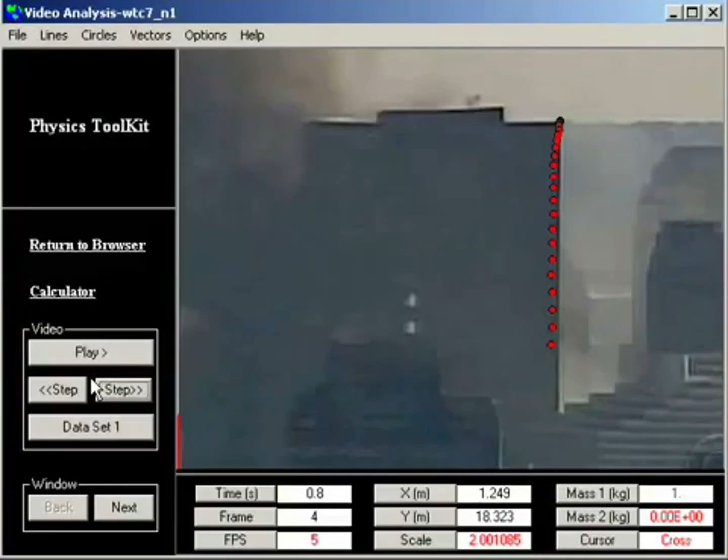I responded with a video posted on YouTube called WTC7 in Free Fall, in which I showed that for approximately 2.5 seconds, Building 7 fell at a rate indistinguishable from free fall. Furthermore, in that video I showed that NIST's methodology was not a way to analyze the true motion of the building. NIST's measurement was not just wrong, it was fraudulent.

Then on August 26th, NIST staged a technical briefing in which engineers and others with technical credentials could pose questions. I'm a high school physics teacher, so I figured I would be excluded. However, I went ahead and registered, citing my membership in the American Association of Physics Teachers as my professional affiliation. By the way, I am not speaking for AAPT. That was just my passport into the briefing. To my surprise, my credentials were accepted and I was able to pose a question. Here's a little of how it went.

Our next question comes from David Chandler of the American Association of Physics Teachers. Any number of competent measurements using a variety of methods indicate the northwest corner of WTC7 fell with an acceleration within a few percent of the acceleration of gravity. Yet your report contradicts this, claiming 40% slower than free fall based on a single data point. How can such a publicly visible, easily measurable quantity be set aside? Can you repeat the question, please? Sure.

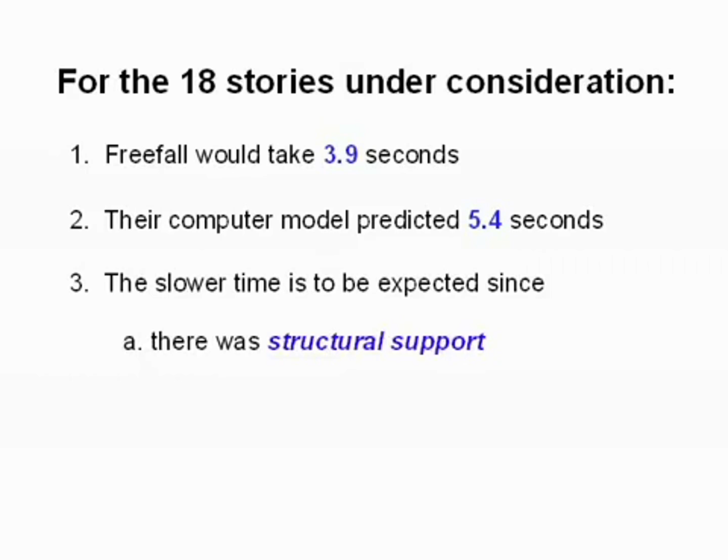Buried in all that verbiage, what Dr. Sunder is saying is, free fall for the 18 stories under consideration would have taken 3.9 seconds. However, their computer model simulating collapse required 5.4 seconds. The slower collapse time was to be expected, since there was structure supporting the building as it fell, slowing the fall, that there was a progression of failures that had to take place, and that these were not instantaneous. All of this makes sense as long as you don't look at the evidence.

The evidence shows that free fall actually occurred, but since their computer modeling could not come up with a scenario that would allow for free fall, they had to declare free fall out of bounds and try to cover up the evidence. The problem is, unlike the columns and girders buried deep inside the building, the motion of the building is right out in plain view.

Since their model predicted 5.4 seconds for the 18-story collapse, they dutifully conjured up a 5.4 second measurement to match. They had to stretch themselves to do it, but they did it. They found the disappearance time, then they went out of their way to pick an artificially early start time, exactly 5.4 seconds earlier. This they compared with free fall time.

This next question comes from Dr. Stephen Jones. NIST discusses the fall time for WTC-7 on page 40 of the summary report, where it's stated, assuming that the descent speed was approximately constant. However, observations by others of the descent speed show that the building is accelerating rather than being at constant speed. So the question is, why did NIST assume that the descent speed was approximately constant?

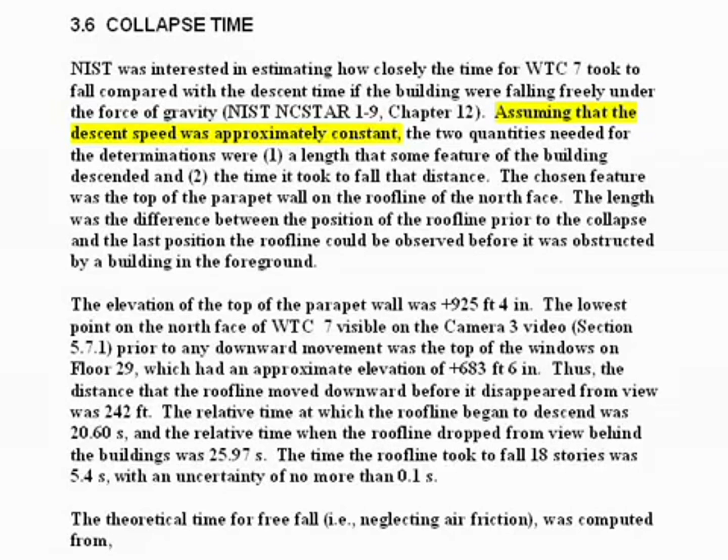Stephen Jones was calling attention to the obviously erroneous claim on page 40 of the draft report that stated that the building descended at constant speed. I'm sure constant speed was a simple misstatement. The correct response should have been, whoops, we'll fix that. But no, here's how they handled that question.

Force of gravity, obviously the acceleration of gravity, is what's the driving force, and our calculation was based on the amount of time from the top of the parapet to fall till it disappeared from view between the two buildings seen in the video. That time was established from the video by single frame search of the time, so that was down to 1/30th of a second, and then we did the same thing for when the top of the parapet disappeared. We found that time to be 5.4 seconds.

I didn't hear a whoops in there, did you? This is John Gross, one of the lead engineers for the NIST report on the collapse of the Twin Towers. He has a PhD in structural engineering from Cornell University. He taught engineering at the University of Colorado in Boulder. He has a long resume on top of that. Don't you think he probably knows the difference between speed and acceleration? Don't you think he could explain it with perfect clarity if he wasn't so preoccupied trying to cover his tracks?

Don't you find it interesting that the 5.4 seconds he measured for the collapse time just happens to exactly match the theoretical prediction of their model? That kind of precision is incredibly rare when modeling real-world events. Incredible is the right word. It's not credible. This measurement has all the characteristics of what we call dry labbing, manipulating the data to fit a predetermined outcome. It's an ethics violation in science on a par with plagiarism. Any engineers engaging in this kind of sleight of hand should lose their licenses. The larger implication, of course, is dry labbing in this kind of investigation would constitute a criminal cover-up.

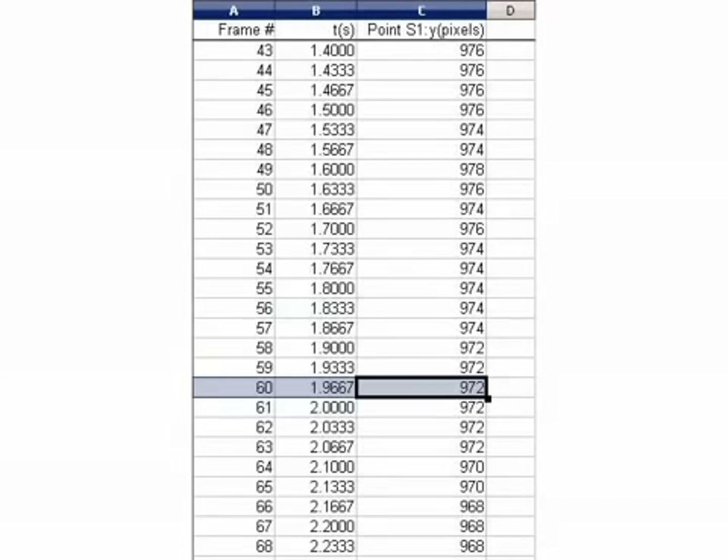Even then, there isn't any progressive ongoing movement of the roofline until about frame 60. By then we're back to just over 3.9 seconds of collapse time, or in other words, the onset of freefall. The only rationale I can see for choosing frame 16 to start the clock is to make the measurement come out to exactly 5.4 seconds, to agree with the prediction of NIST's collapse model.

But what if I'm wrong? What if they did see some tiny movement on a clearer version of the video? That tiny movement, whatever it might have been, did not last. It would have had to have been a glitch, and the scientists at NIST would recognize it as a glitch, because there's no measurable difference in the height of the roofline for the next 20 to 30 frames.

What can we conclude? You can draw your own conclusions, but I think it's pretty clear that the whole idea there is any kind of real 5.4 second collapse interval is a fiction. It's a crude fabrication, and the three-stage collapse sequence is pseudoscience in the service of an ongoing cover-up. In Part 3, we will return to the central question. In conceding freefall, what has NIST actually admitted?

Shyam Sunder is the lead investigator for the NIST analysis of the collapse of World Trade Center Building 7. In the technical briefing on August 26th, Dr. Sunder clearly explained why freefall for World Trade Center 7 was impossible.

The analysis showed there's a difference in time between a free fall time. A free fall time would be an object that has no structural components below it. And that is not at all unusual, because there was structural resistance that was provided in this particular case. And you had a sequence of structural failures that had to take place, and where everything was not instantaneous.

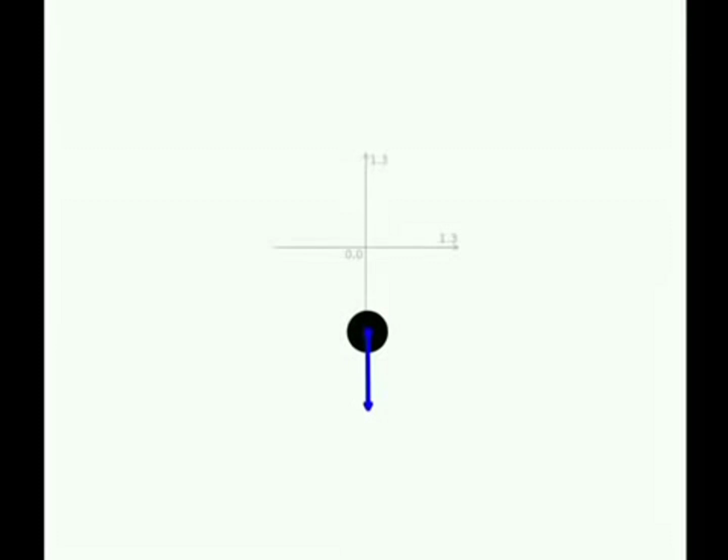Anything at an elevated height has gravitational potential energy. If it falls and none of the energy is used for other things along the way, all of that energy is converted into kinetic energy, the energy of motion, and we call it free fall. If any of the energy is used for other purposes, there will be less kinetic energy, so the fall will be slower.

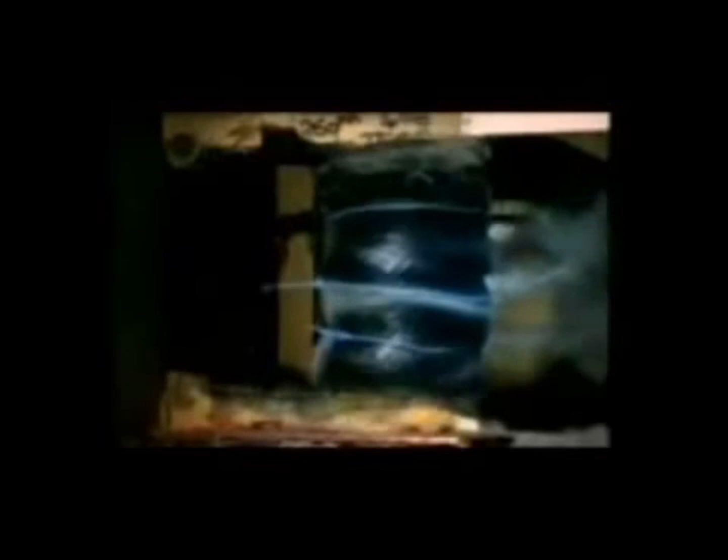In the case of a falling building, the only way it can go into free fall is if an external force removes the supporting structure. None of the gravitational potential energy of the building is available for this purpose, or it would slow the fall of the building. The fact of freefall by itself is strong evidence of explosive demolition, but the evidence is even stronger than that.

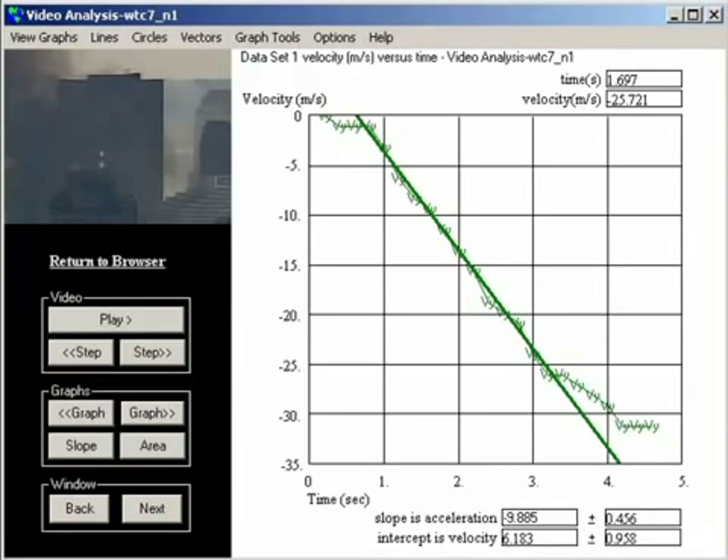My original analysis looks like this. I have since confirmed my measurement using a different software package. Both of these graphs plot velocity versus time. A straight line indicates constant acceleration, and the slope of the line indicates the rate of acceleration. What is particularly striking is the suddenness of onset of freefall. The acceleration doesn't build up gradually. The graph simply turns a corner. The building went from full support to zero support instantly.

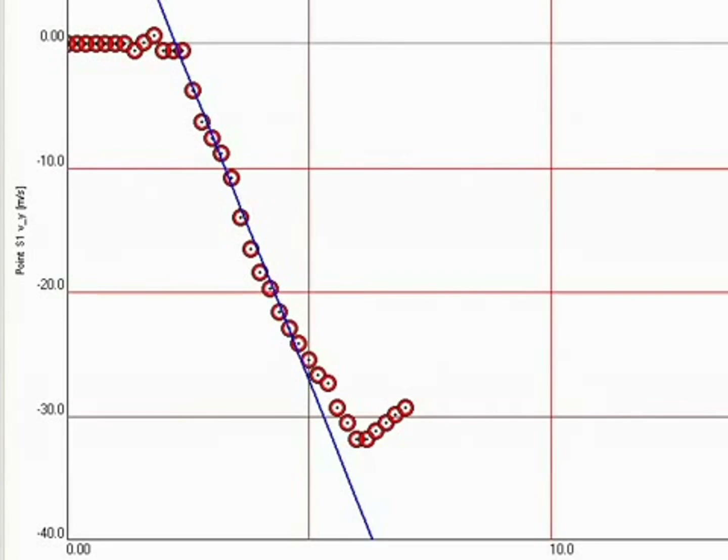The straight part fits the data reasonably well. What is totally misleading are the gradual transitions into and out of freefall. The raw data speaks for itself. One moment the building is holding, the next moment it lets go and is in complete freefall. The onset of freefall was not only sudden, it extended across the whole width of the building.

My measurement of the acceleration of the building was based on the northwest corner. This recent measurement confirming freefall was based on a point midway along the roofline. The fact that the roof stayed level shows the building was in freefall across the entire width.

The collapse we see cannot be due to a column failure or a few column failures or a sequence of column failures. All 24 interior columns and 58 perimeter columns had to have been removed over the span of 8 floors low in the building simultaneously to within a small fraction of a second, and in such a way that the top half of the building remains intact and uncrumpled.

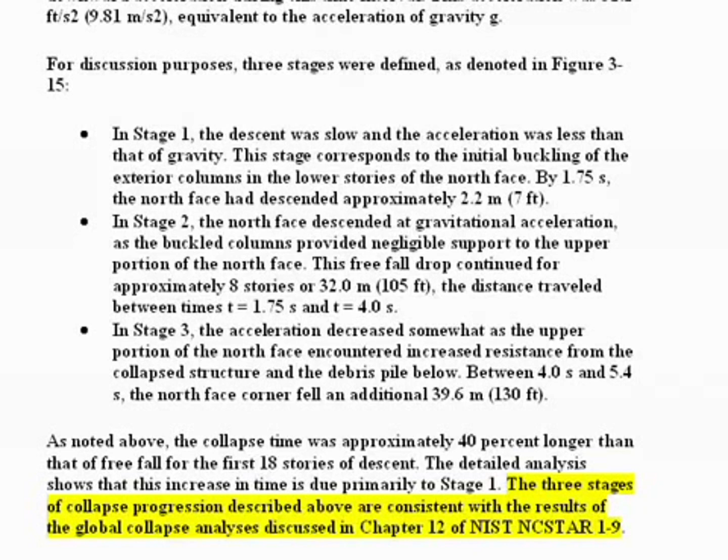Let's come back to NIST's acceptance of freefall. Here is their exact wording. Quote, "The 3 stages of collapse progression described above are consistent with the results of the global collapse analyses discussed in Chapter 12 of NIST NCSTAR 1-9," unquote. In other words, they're giving the appearance of claiming freefall is okay, but actually it's the 5.4 second duration of their 3-stage analysis that matches their model.

But we saw in Part 2 of this video series that the 5.4 seconds depends on an artificially early start time, which has no valid observational basis. Without the 5.4 second fig leaf, they are left with freefall and nothing more. NIST does not show how freefall is consistent with their hypothesis, because, as Shyam Sunder has correctly and eloquently explained, freefall for a naturally collapsing building is impossible.

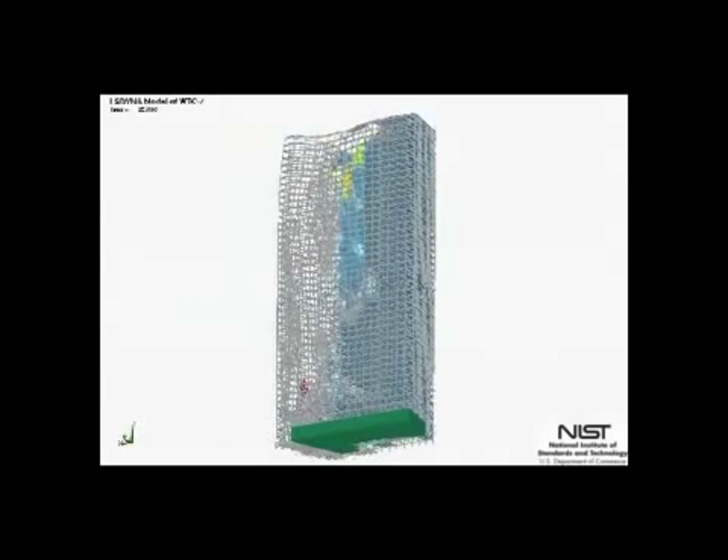This brings us to their computer model. NIST's so-called investigation actually consists of finding a way to reproduce the mysterious collapse of the building using a computer model. The assumption is that if the computer model can be made to reproduce the observed collapse pattern, that must be how it happened. The problem is, if something unexpected was going on, like explosives for instance, you're not going to discover it in the computer model.

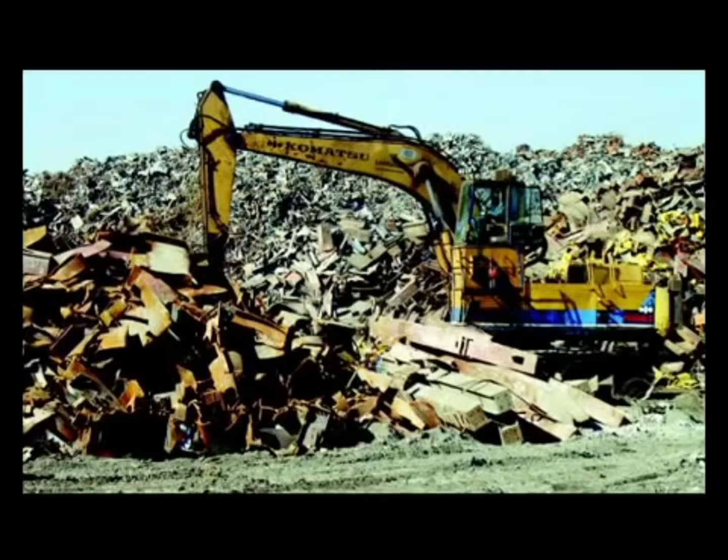For that, you need to look at the actual evidence. So why not examine the steel directly? Oh yes, there isn't any. At least there isn't any after it was hauled away to Asia and melted down.

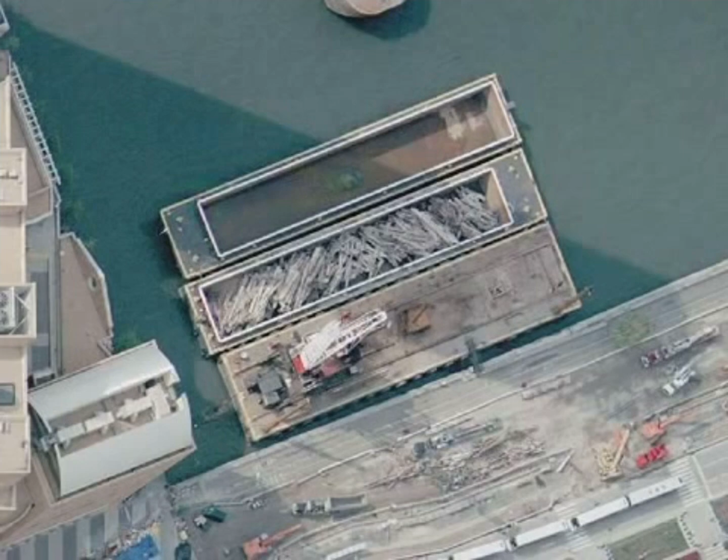NIST's investigation has been compared to conducting an autopsy without the corpse. As of 2005, NIST reported having only 236 pieces of steel from the World Trade Center complex, none of them unambiguously identified as being from World Trade Center 7. We've all watched CSI. Anyone serious about solving a crime knows the importance of physical evidence. Yet here the crime scene was scrubbed, the evidence was destroyed, and the investigation was delayed for years.

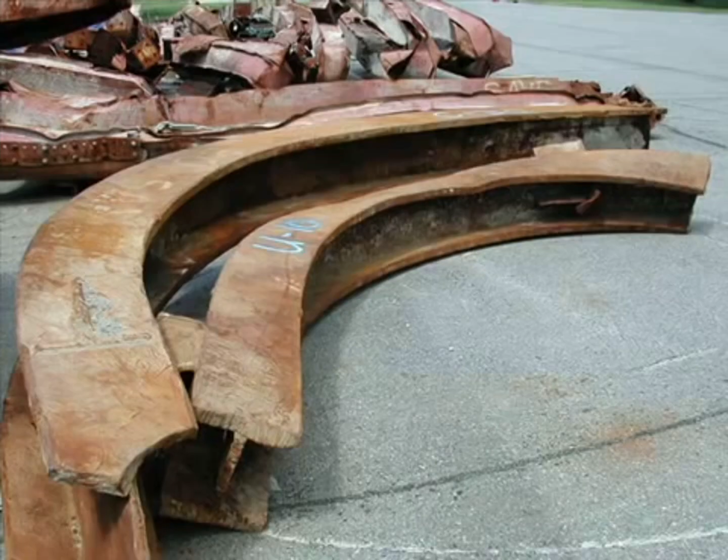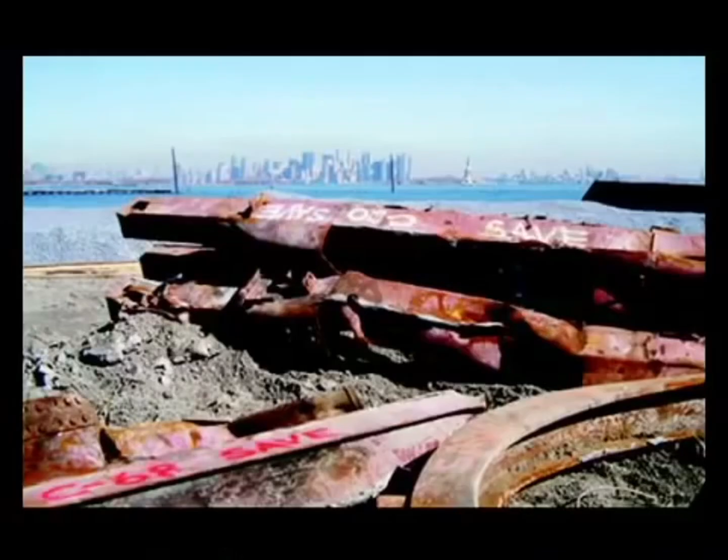Destroying a crime scene is itself a criminal act. Destroying the steel has absolutely no justification except to cover up the cause of the collapse. So even if we knew nothing else about the events of that day, we can see immediately there was a cover-up. Knowing there was a cover-up is a strong indication there was a crime someone wanted covered up. Any investigation that does not acknowledge this basic fact is not really an investigation. It's an extension of the cover-up.

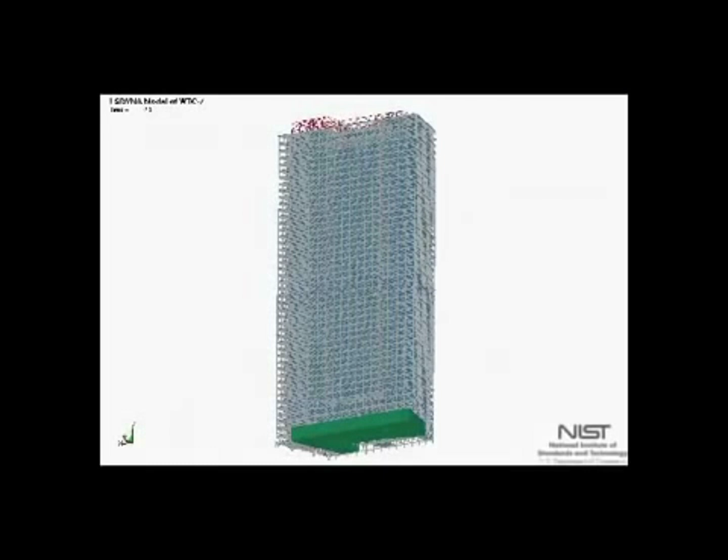NIST claims their computer model can account for the observed phenomena. So let's look at NIST's model. Except we can't. The software they use to do the modeling is available, but their model actually consists of all the numbers and measurements and assumptions, together with any tweaks to the system they might have used to get it to come out the way they wanted. If that information were released, their results could be checked by anyone with the appropriate skills and software tools. But NIST has not released the numbers. All we've been shown are some of the selected animated outputs they were able to get their model to produce.

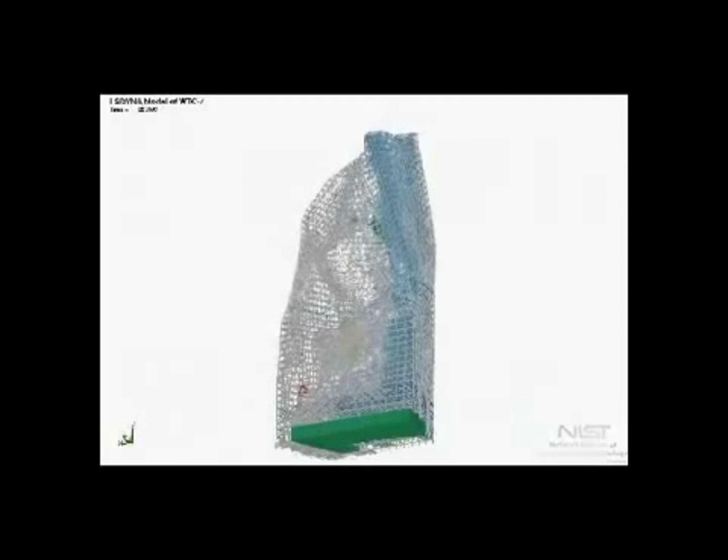Is their model realistic? We don't know. Some models are chaotic in the mathematical sense. In other words, tiny variations in the inputs might result in wildly different outcomes. Is NIST's model stable or chaotic? Realistic or contrived? Honest or fraudulent? We don't know. We can't know without independent testing. The very process of running the model until it produces the kind of result you're looking for is called selection bias. If you think about it, NIST's methodology is explicitly based on selection bias. Even if you could show what might have happened, it doesn't show what actually did happen.

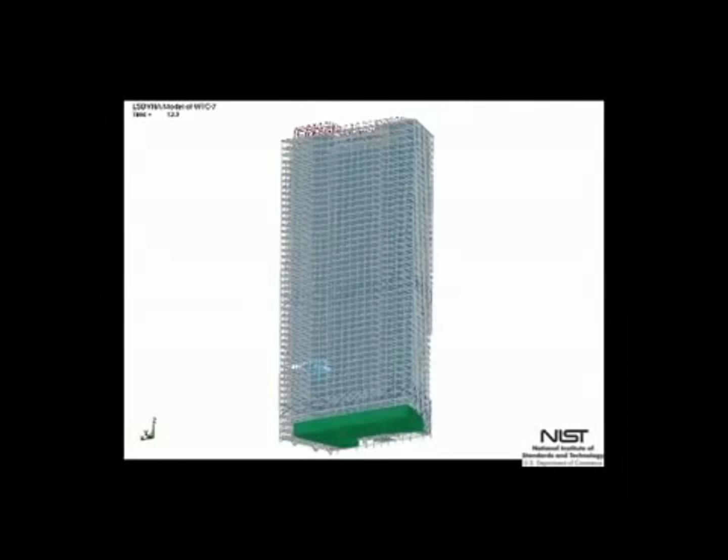The very fact that NIST has not released their model strongly suggests they don't want their results checked. In other words, their results are intended to be taken strictly on faith. If NIST has not released their modeling data and their assumptions, they have really not released their report. And the fact that this is their final report indicates they do not intend to do so. Therefore, on the face of it, their report is little more than a fancy, expensive cover-up.

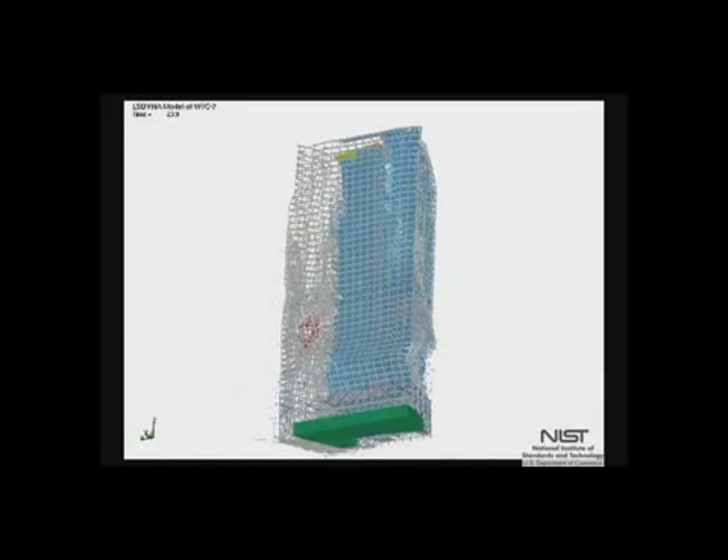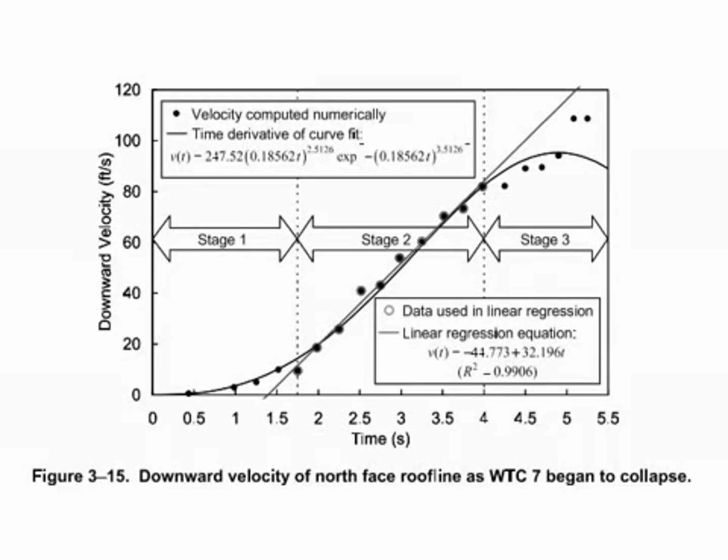One fact we do know about NIST's model is it does not allow for freefall. The best they could do is 5.4 seconds for the building to crumple down through 18 floors. Crumpling absorbs energy, and that makes freefall impossible. There's nothing in the models we have been shown that even resembles a three-stage collapse with a freefall component. After all, as Shyam Sunder put it himself, freefall happens only when there are no structural components below the falling section of the building. Any natural scenario is going to involve a progression of failures, and these don't happen instantaneously.

So, in the end, we come back to where we were in the beginning. On first impression, we were looking at a classic controlled demolition. NIST claimed to have found a way it could have happened naturally, but in fact they failed. The only way they can support their claim is through lies, secrecy, and pompous but false pronouncements. That constitutes a failed agenda. Explosive demolition is the only scenario that has been put forward that could actually account for the observations.

Where does that leave us? We have a building that underwent directly observable and now officially acknowledged freefall, with no plausible mechanisms other than explosive demolition. We have an official investigation by a government agency that has fraudulently manipulated data, that has refused to even consider existing physical evidence that explosives were used. They have wrapped themselves and their data in secrecy and offered up pronouncements as conclusions to be taken on faith. The NIST investigation is a fraud and a farce. We need a new, fully empowered, truly independent, and open investigation.